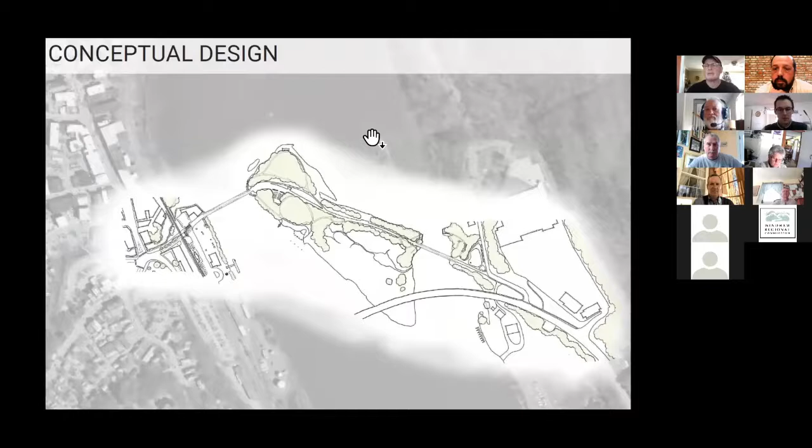So we're here to go over the revised conceptual plan for the island and existing bridges. It's titled The Living River, Balancing Recreation and Conservation Along the Hinsdale Island Greenway. So here we're looking at the conceptual design, and this is defined most prominently by the multimodal pedestrian spine running through the island and along the existing bridges, called the Hinsdale Island Greenway.

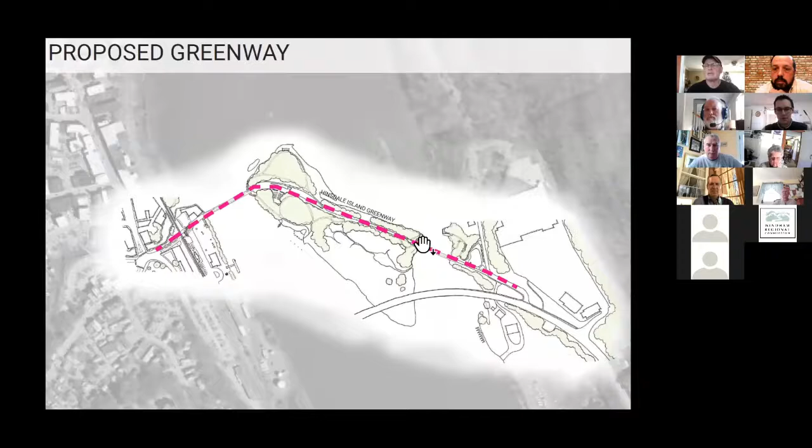This proposed pedestrian connection, bicycle connection, serves to connect downtown Brattleboro and the Brattleboro Amtrak station immediately to the development on the New Hampshire side, Runnings and Norms, as well as the Wantastiquet-Monadnock Trail and Wantastiquet Mountain.

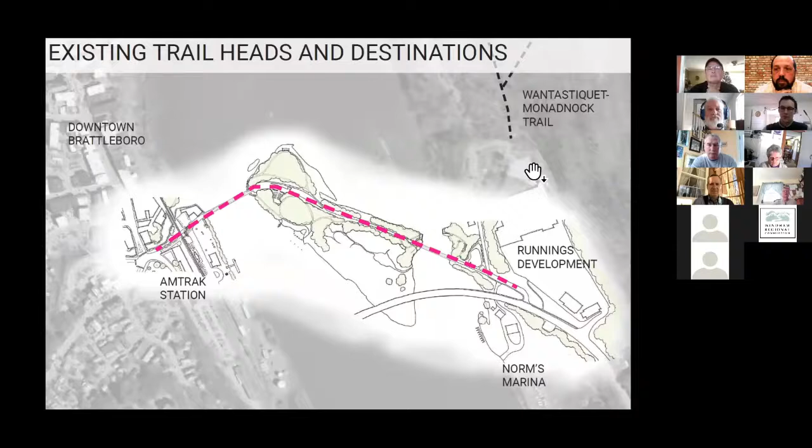In addition, it keeps an open mind to future new connections beyond the scope of this project, such as river access, connecting this proposal to the West River Trail network to the north in Vermont, and also an extender on the New Hampshire side between the end of this project and the current end of the Fort Hill Rail Trail, which would in effect create a pedestrian and bicycle connection across the river from the entirety of the West River Trails all the way through the Fort Hill Rail Trail and Hinsdale.

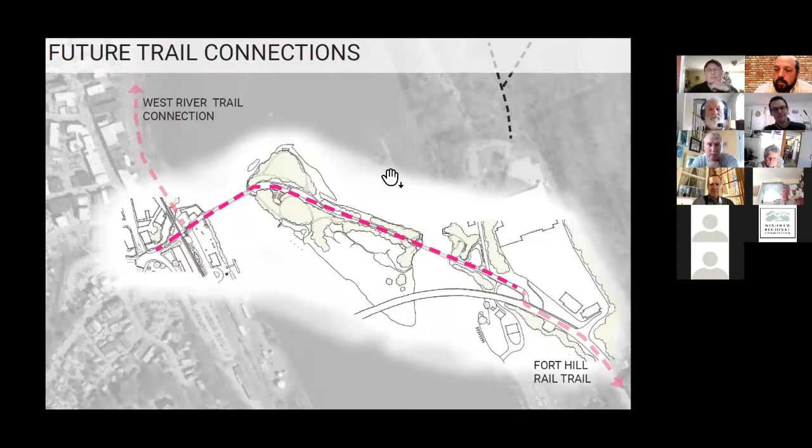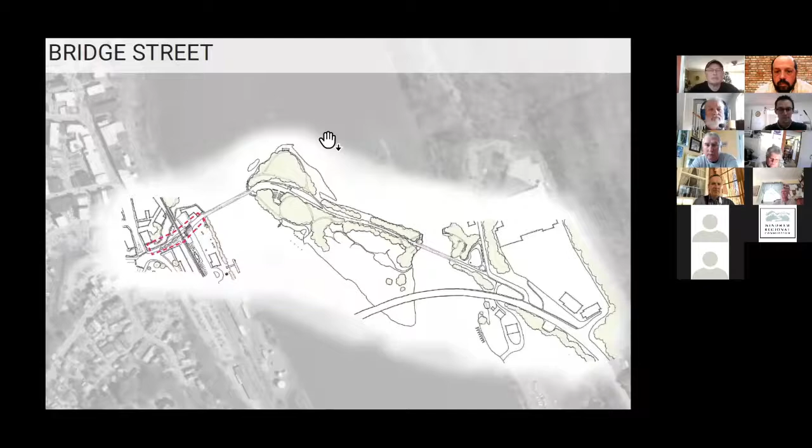A quick note is that in all renderings, the Anna Hunt Marsh and Charles Dana bridges are being shown in a new color to illustrate the potential and also the significance of color as a design choice. I don't have a ton of marker colors that really pop, and so red is the one I went with. So I'm not specifically advocating for red. I believe the color choice is something the communities and committee should decide, but I do think it's an important decision that needs to be considered.

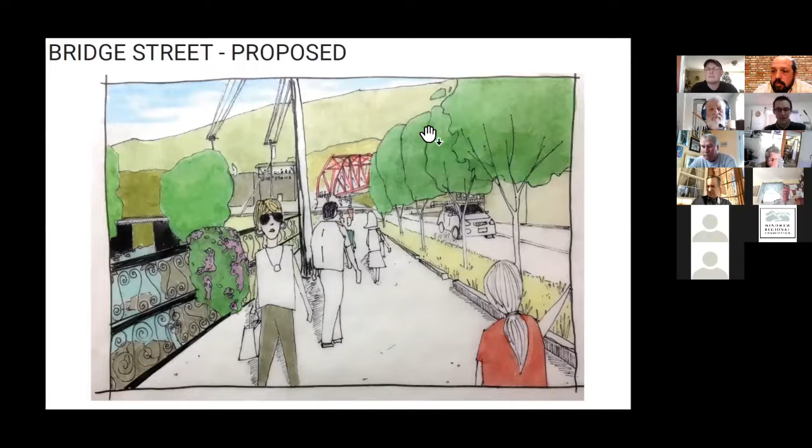As you move down along the Greenway, you approach the Anna Hunt Marsh Bridge. Currently, it's a paved streetway, and upon renovation and design implementation, we're proposing a mixed-use, multimodal transportation route. So space is split between movement and gathering. The majority is given to movement back and forth across the bridge, but then using movable installations, such as standing tables shown here on the Whetstone Brewery end of the bridge, and planter boxes to create separation and define space to allow for a range of activities to take place.

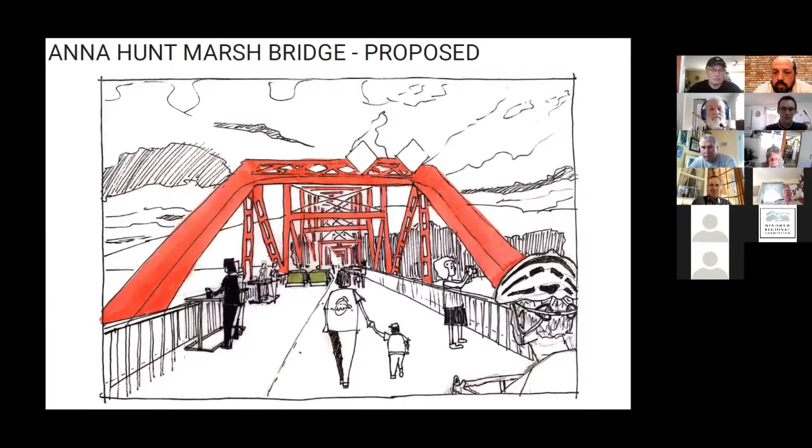In this proposal, the travel width along the bridge is 12 feet wide. After talking with the chief of fire from one of the towns, we determined that about 10 feet would be adequate for the existing trucks in town. So this should maintain more than adequate emergency vehicle access across the bridges and to the island.

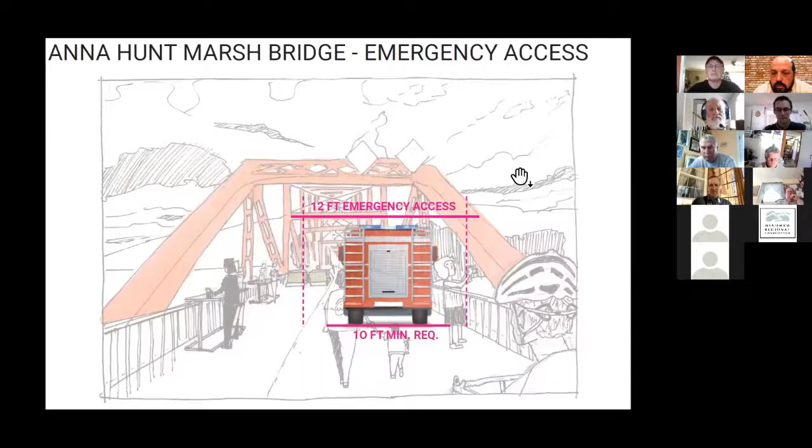For the design approach to both bridges, the Anna Hunt Marsh and the Charles Dana, I believe that it would benefit from being a flexible approach defined by modular components. I think this is important because it allows for the evolution of the design to better suit community needs and possibly changing needs, whether that's over years or over seasons.

And so here are just two initial sort of back of napkin working sketches on what some of those modular and movable planters may look like. But this also extends to any sort of tables or seating furniture.

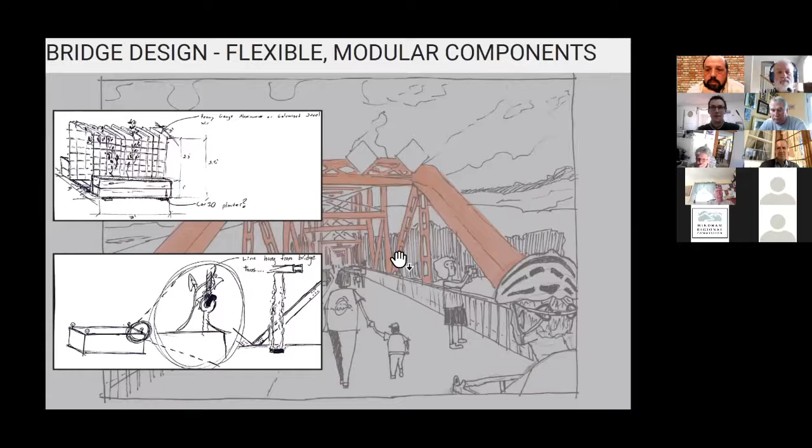Now, again, this allows for the design to respond to use and feedback, and also gives you the flexibility to consider the use of these bridges for other sorts of events, whether it's community art takeover or some sort of market. I've also heard suggestions through our various public forums of wedding venue or wedding photography and whatnot.

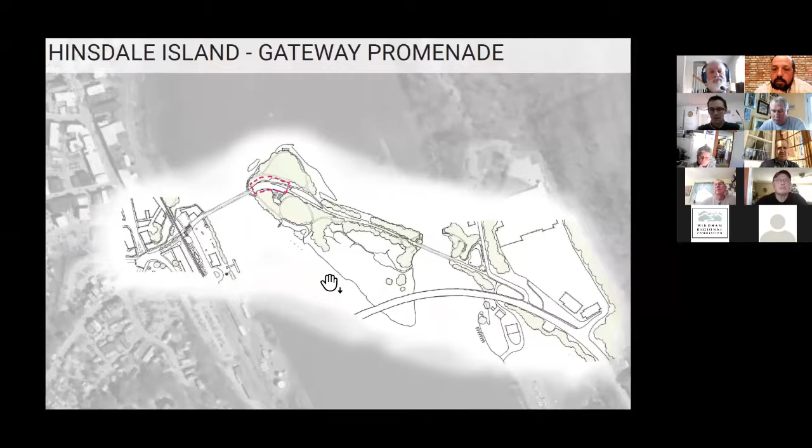And then at the terminus of the Anna Hunt Marsh Bridge, we come onto the western edge of the island. This is where we're proposing a fairly wide gateway promenade, outlined in pink on this plan. And this is the location and the existing conditions. And the proposal is going to utilize both the existing roadway at this point and a section of this grass shoulder and turning into temporary parking, I believe a gravel surface.

This is a section rather than a perspective, so a cut through the roadway at that point, showing the width around 50 feet. So again, that's the width of the existing roadway and that grassed shoulder, and its potential uses. Bumping out the width of the promenade at this initial entry point allows for more flexible uses. It allows you to keep transportation avenues open while also bringing on to the island other programming to support events, whether it's cultural events at the amphitheater or community events arranged more along the spine of the Greenway itself. So here you see some food trucks brought to the island.

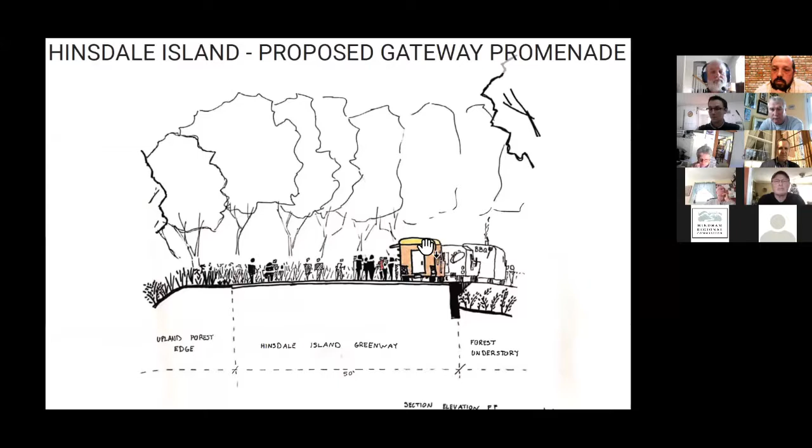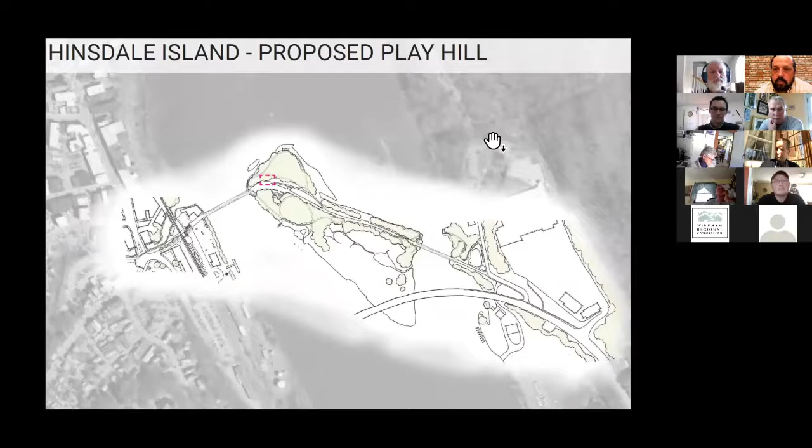Off of this promenade to the northern edge is the proposed play hill. And so this is a rendering of that proposed play hill. It's a low impact, very naturalistic proposition here. No slides, no sort of typical playground equipment, simply using a series of rock blocks placed into the hillside to create a sort of artificial rock scramble for both children and, nothing would stop adults too from enjoying this, moving between the roadway ridgeline and the base of the ridgeline in this existing forest. And this is oriented to the west, looking at the Brattleboro skyline in the background there.

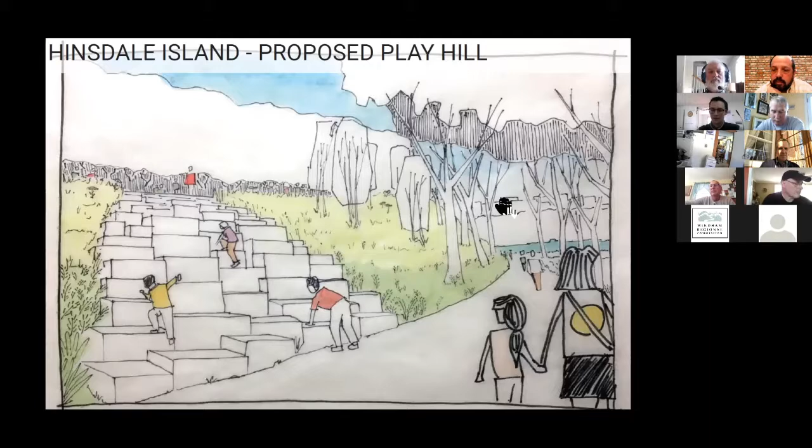So just a little bit further towards the end of that wider promenade gateway is the proposed amphitheater. So this siting changed a little bit. It moved a little further inland from the last time I presented, and that's to decrease the environmental impact of this amphitheater development. There was quite a strong view expressed for sort of a least intensive development without much hardscaping, such as retaining walls, seating walls, and whatnot. So that requires a space with a bit more run and a bit less steep grade, and so that led to this move.

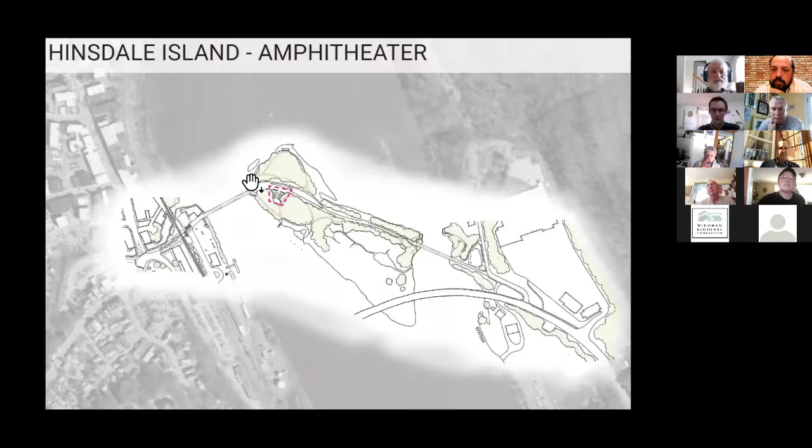The existing conditions here are what would be a fairly open understory if it weren't for the current sort of dominant invasive species, primarily Asiatic bittersweet, but also multiflora rose and Japanese barberry, that are currently occupying the understory and much of the overstory as well.

The proposed conditions here show it's about a 60 to 70 foot deep space, and then you have a small level performance space at the base with a medium grade, 8 to 10% down, and relatively low impact rings of seating. There is a flat level area offset of the Greenway at the top for ADA access, as well as we'll see a ramp curving down in the adjacent woodlands to provide ADA access at the base. Additionally, the vegetation management should allow for views to open up to the water from this space, which will help increase its multi-seasonal appeal.

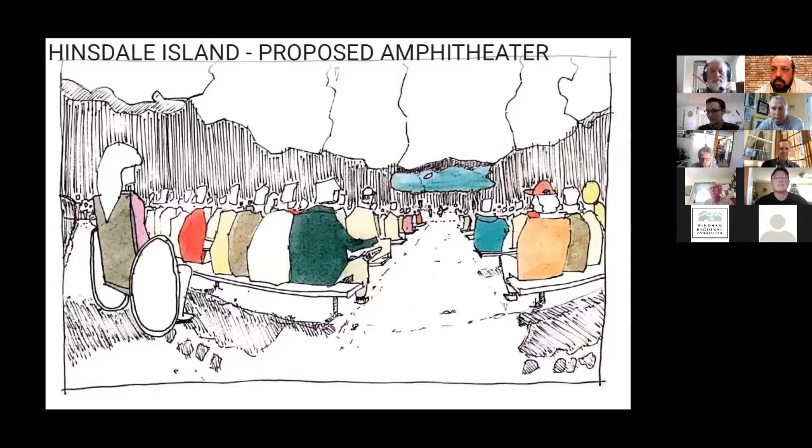Moving a bit further towards the sort of hanging off of the center of the island, but towards this southwestern facing edge, is the proposed public water access. We're calling the Hinsdale Island Beach and Cove. This can be accessed by the two ramps towards the center of the island leading down, or through the ramp adjacent to the amphitheater leading down. And we're going to zoom in on this in just a second.

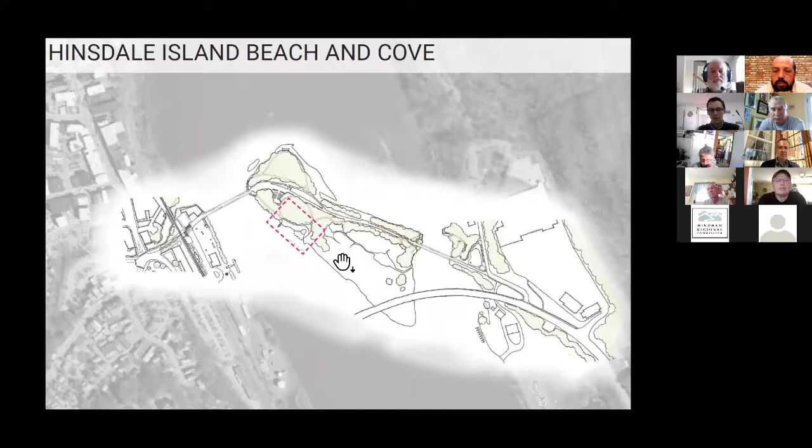So the space really doesn't get pulled too far into the island, and again, that's to reduce disturbance to the existing overstory floodplain trees. And it utilizes a small stretch of shoreline, which would be cleared where the beach is, and a slight change to the shoreline structure as well. A slight, very shallow, like 1 or 2 feet down, depression would be created to create this protected cove, which will act as sort of a wading area for younger kids, just a foot or two deep.

A series of placed boulders protect the entrance to the cove, and a small section for slightly deeper wading and swimming. And then off of that, further out into the river, proposing a handful of dock pilings, which would provide opportunities for boats to tie up and owners to wade in. The short stretch of unprotected beach closer to the top allows opportunities for motorized boats of the appropriate craft to nose up and anchor into the shallows.

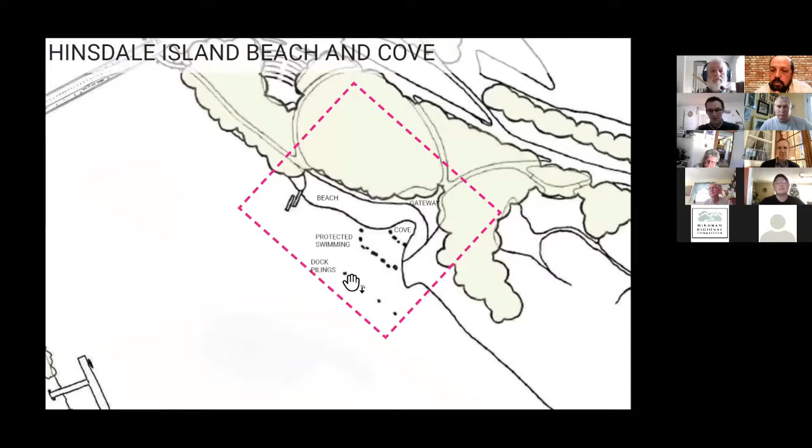As well, the entirety of this is open to paddle boards and kayakers pulling their craft up, and they would be able to slip through these boulders and access the entirety of the beach. We're going to look at this gateway space first, inland of the cove. Then we're going to look at a transect from the gateway to the dock pilings, and finally we're going to look at a rendering of the beach.

This is a section through that gateway showing sort of the proportions of the space. There's a nice entryway that runs straight from where these two ramps down through the now managed and enhanced native understory. Enter and go to the cove, and then off to the side there's spaces to introduce a few seating elements.

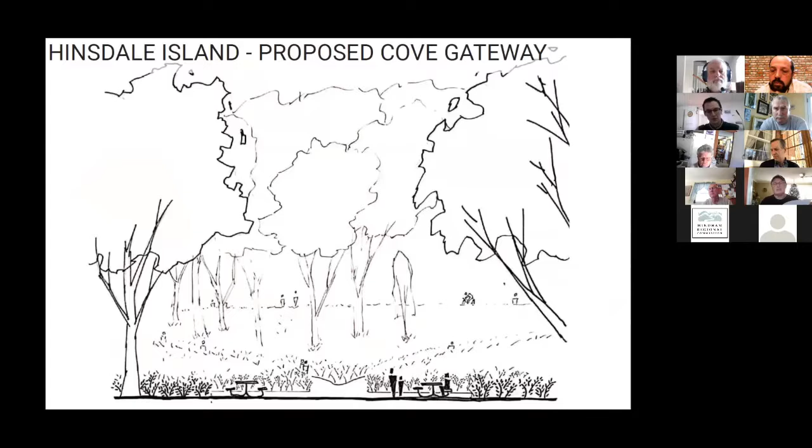Here on the left, where again is that same gateway and seating space, you see the short section of beach with the wading inlet and the first round of protective boulders. You see the deeper wading and protected swimming area with a second round of boulders. And then you see some additional section leading out to where those pilings are for boat tie-ups.

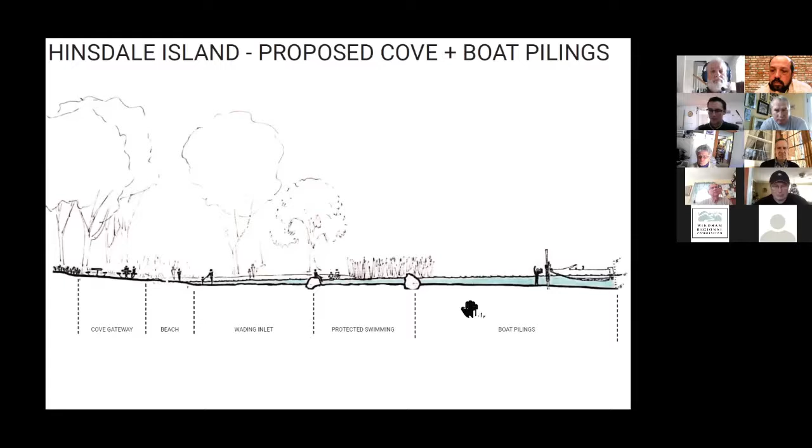And this, from that protective ring of boulders, is a rendering looking at that stretch of beach along the shoreline. Again, showing those opportunities for different types of use, for different types of craft to pull up, and the introduction of these seating ledges to delineate the walking path from the beach so that craft aren't pulled up too far and block movement through the space.

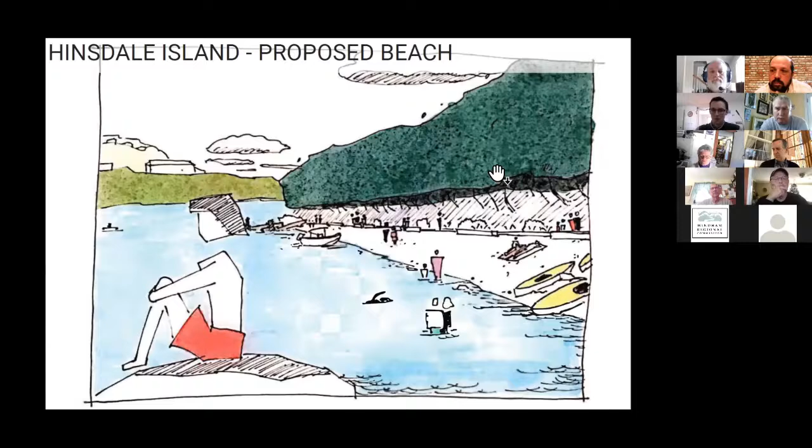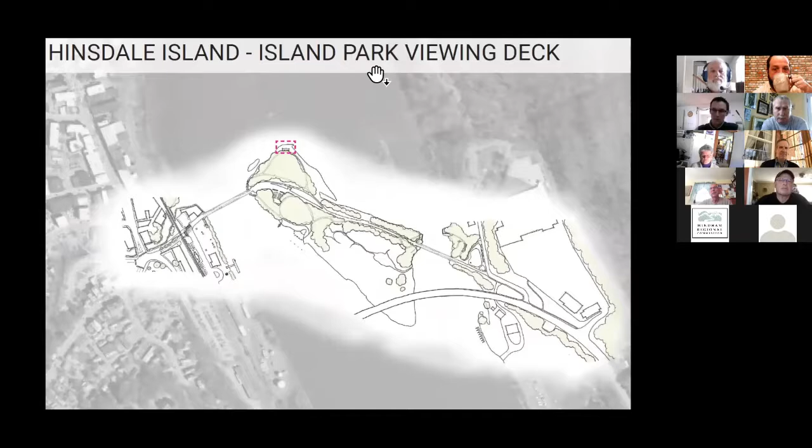Moving to the northernmost tip of the island, we're looking at the proposed Island Park viewing deck. And this is meant to provide a sort of pristine platform for scenic viewing, wildlife viewing, and also people viewing as motorized craft and paddlers move up and down the river.

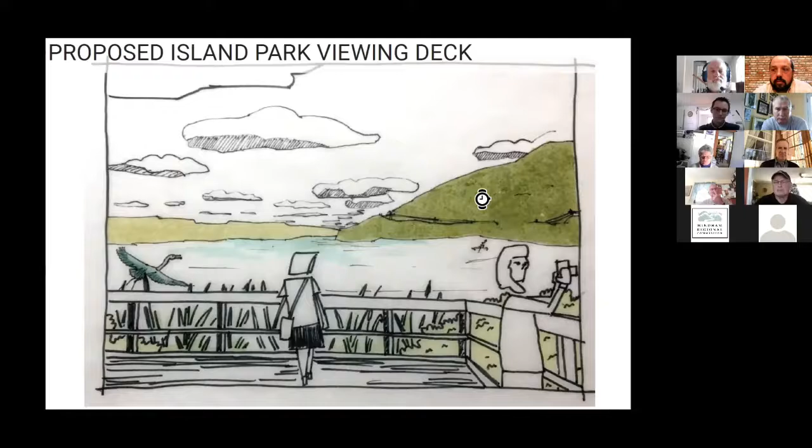As we continue along the Greenway to the eastern portion of the island, the portion of the island outside of the roadside is dominated by marsh, which has been set aside and conserved in this conceptual plan. We have 3 more wildlife viewing platforms. 2 of them in the middle and towards the end of the island face the marsh for wildlife viewing and also scenic viewing downriver. And 1 in between those 2 faces to the north, allowing for upriver viewing, also great views of the Wantastiquet Mountain and that small island just about 100 yards or so off the main Hinsdale Island.

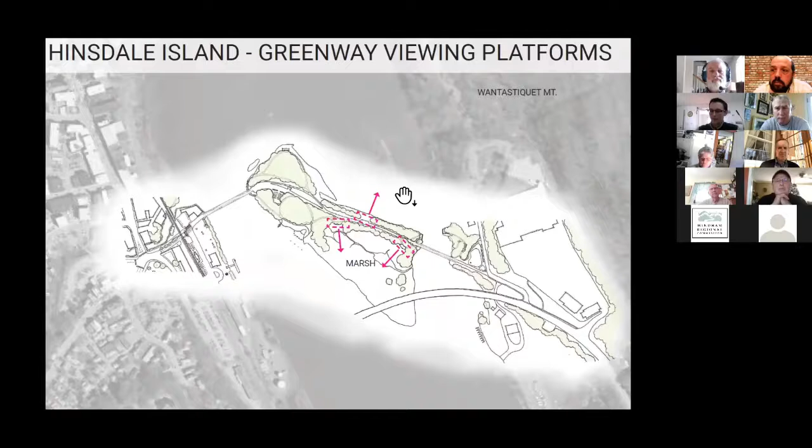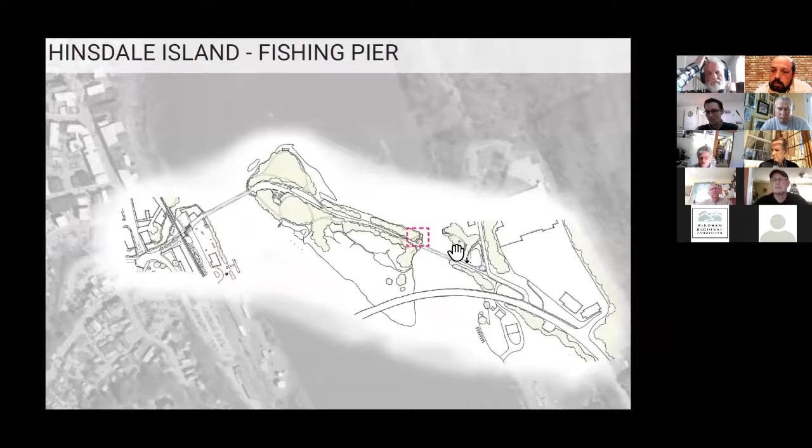At the easternmost end, just off of where the Charles Dana touches down, is one of the older bridge footings that's currently been observed as being a good spot for fishing due to less vegetation along the edge to tangle your line in. So this is being proposed to continue to be set aside as a fishing pier, but improving access to it, providing a bit of seating and trimming a bush or 2 that currently would tangle up lines.

As mentioned previously, the Charles Dana Bridge is going to have a lot of similarity in design aesthetic, modular components, and types of spaces as to the Anna Hunt Marsh, except it's going to prioritize a bit more heavily areas for scenic viewing and sort of more contemplative spaces as we sort of move along this gradient between denser populated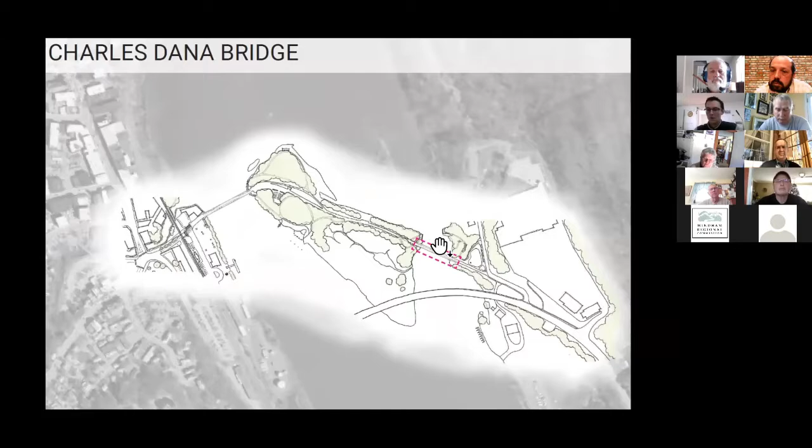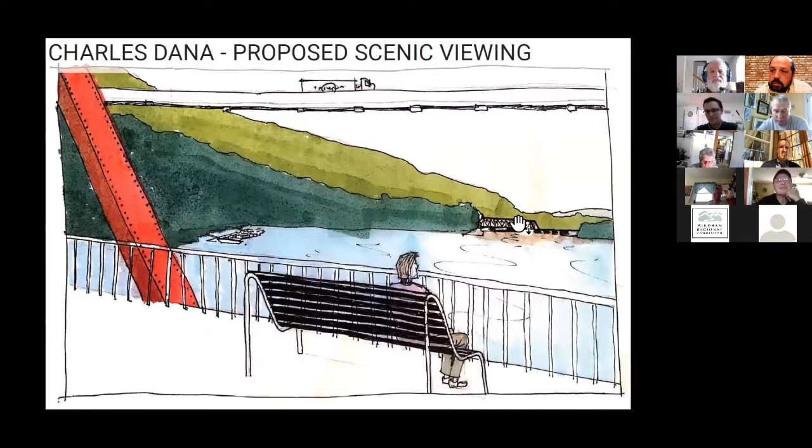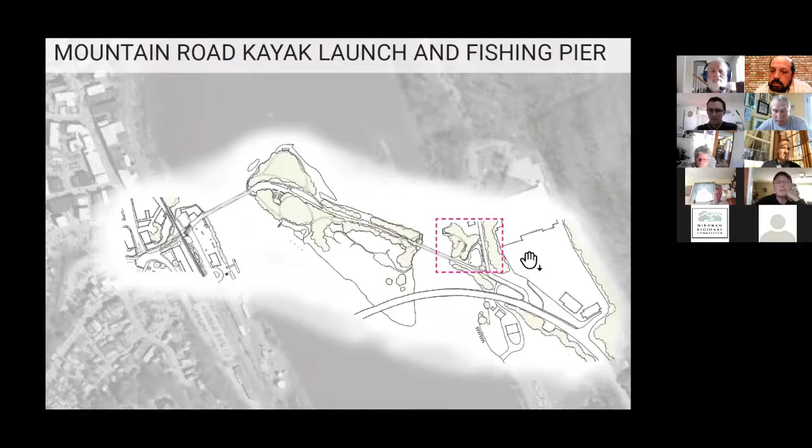All the way on the New Hampshire side, in between the Charles Dana and Mountain Road, is a parcel that is going to be developed in part by DOT to retain and treat stormwater coming off the roadsides. And there's also a proposal here to provide it as a point of water access on the New Hampshire side. So we're going to zoom in here and take a look at that.

So here we have our Mountain Road just downhill of the Runnings building. And what's being proposed is a water access that provides for a kayak launch point on the New Hampshire side and also access to a second fishing pier. Now, this is going to require a slight change in the most up-to-date plans I've seen for the stormwater basin.

In order to get room to have any on-street parking on Mountain Road, the stormwater basin is going to have to be moved about 10 to 13 feet west away from the road base, which may be achievable. We'd have to talk with DOT and sort of get into the details.

I believe this is an effort worth considering quite strongly, because although the Runnings owner has graciously said that she would allow people who wanted to access the water here to park in her development, that's still quite a hike, whether it's around the back or down the front on the new proposed ramp that New Hampshire DOT will be building to get down to this section of Mountain Road and access the water.

Being able to, at the very least, drop off and ideally have a parking space or 2 will greatly, I believe, improve the usability of this water access point, and also make it a premier water access point for ADA access. We have the room here to run out an ADA graded path all the way down to the water and the fishing pier.

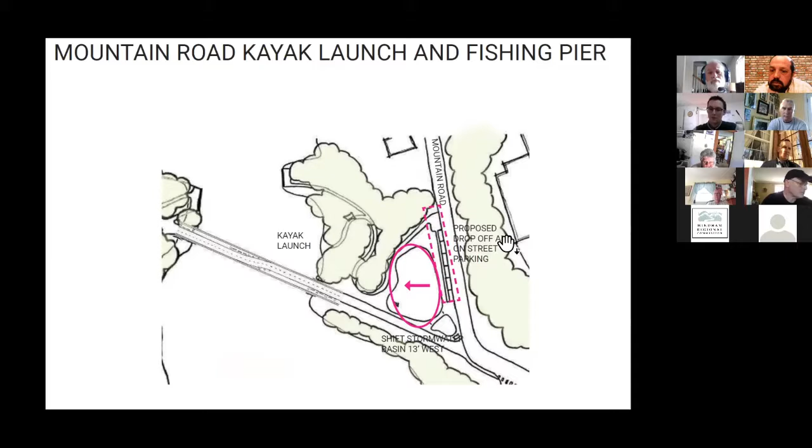So being able to park adjacent to it and cut down the amount of the ADA path you need to traverse makes it much more friendly to movement challenged portions of the population. I want to take a moment to talk about the conceptual path systems.

They're being conceptualized as 3 levels of accessibility, and the majority are being conceptualized as ADA accessible. In a large part, this is simply the status quo. The entire spine of this is running along an existing roadway, which is ADA accessible, both in surfacing material and grade, and that's going to be maintained.

Additionally, some of the new paths to sort of the critical community-based gathering places off of this main spine are also being proposed as being designed in such a way and with such materials as to be ADA accessible. That includes this loop connecting to both the front of the amphitheater and this big water access gathering space, as well as to the viewing platforms and the fishing pier.

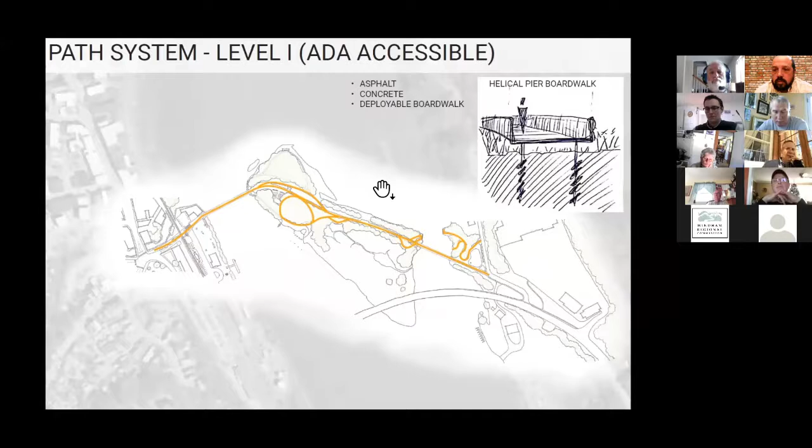In addition, ADA graded paths will make it easier for people to get down to the northern portion of the island. And so this is going to be composed of a range of materials. A lot of the existing is asphalt. Where possible, asphalt and concrete would be the economical choice for new paths.

And then where environmental concerns bar the use of asphalt and concrete, then we think about more creative solutions, whether that's floated boardwalk on helical piers, whether that's more of a low-tech deployable boardwalk, similar to what's used often on Cape Cod dunes, where you have boards attached by fiber that can be rolled up and unrolled and deployed along pathways in more of a seasonal manner.

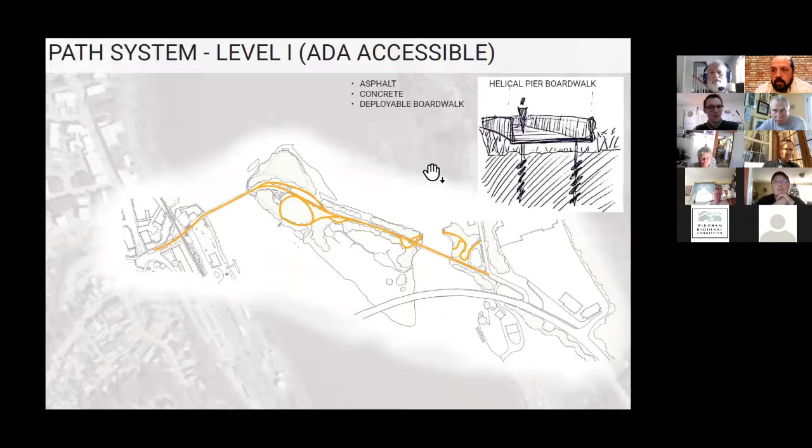Level 2 access consists of this loop around the western edge of the island, under the bridge, and around this promenade. And so this would be more of a packed gravel path. So not ADA accessible, but still graded very accessibly, still a very accessible material, just not to the degree of what's necessary, say, for wheelchair access.

Then finally, level 3 would be the widest ranging loop out to the northern tip of the island. This will be the lowest impact and the most sensitive path that's put in, proposed simply as a packed earth footpath. And so this will also, you'll see, have varying accessibility with the seasons, right? In the wet season, probably none but the most avid birder will want to get their feet muddy and make it out to that viewing platform. But then in dry weather in the summer months, quite accessible to a majority of the population.

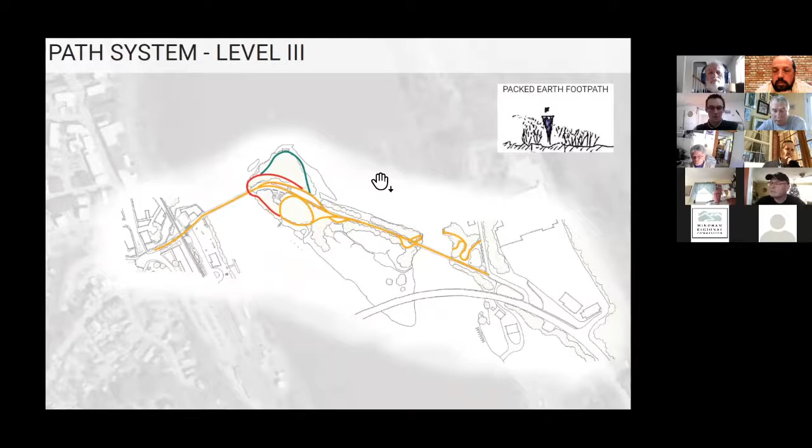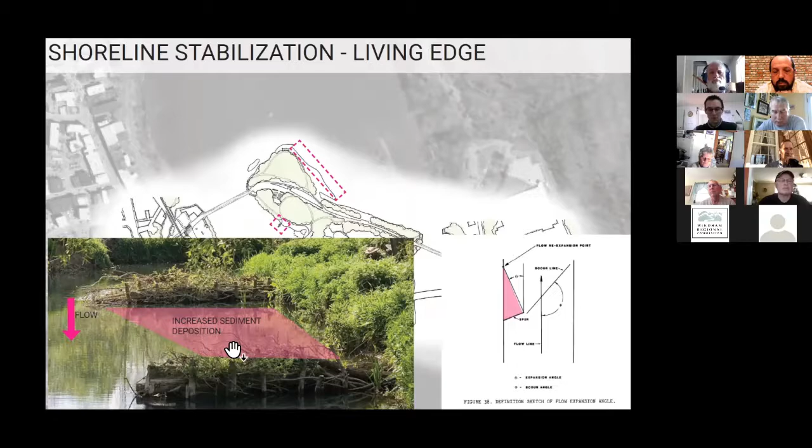This is an example, on a smaller stream channel, of what this type of thing looks like. Instead of a single log and root wad, they used wattles, which is bunches of medium-sized logs sort of staked together into a mass. And again, showing the area of lower flow rate and therefore increased sediment deposition and shoreline protection. When partnered with the planting of willows and alders on the shoreline adjacent to where these structures connect, you sort of get a synergistic effect.

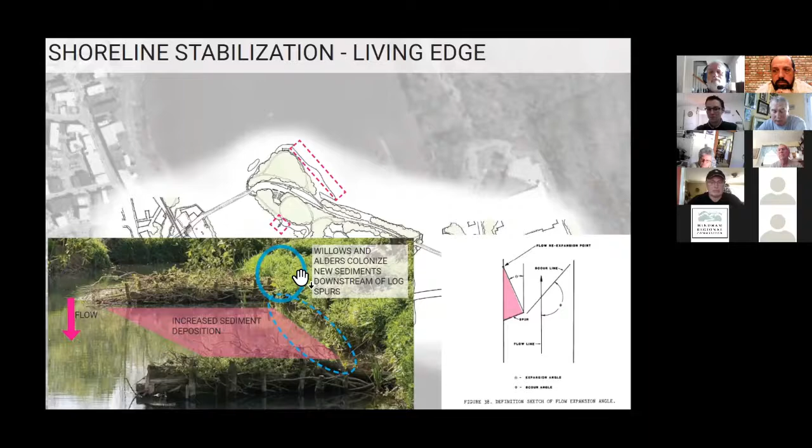These types of plants are great for wildlife value, and they're vegetative colonizers, so they will spread and sprout via roots, and they're very adept at spreading into new uncolonized shoreline sediments. And so as those sediments accrue downstream of these structures, they are colonized pretty quickly by the willows and alders, which help to hold them in place during flood conditions.

And then the other type of strategy is for a channel that's been identified when studying the topography. The channel is along this purple line. It's not permanently filled with water. It's a flood channel, so during flood conditions it would fill up. And it's a foot or two deeper than the rest of this northern part of the island. And so what that means is you have deeper and more water force impacting the base of the existing roadway.

And so I'm proposing a strategy of leaky dams, which again uses primarily woody debris, either in bundles or larger logs, placed perpendicular to the channel. And what it does is, again, trap sediment, slow down the flow rate, and also expand the floodplain to adjacent lands so that more sediment settles out and over time raises the height of that land.

And so these ideas would be something where, when you get further down the line, whether it's this committee or another one, and begin to think about phasing of whatever the final design is, I'd encourage it to be included at a test scale in phase 1, just to make sure that it works in this exact context. And if it does, then you can, with more confidence, go ahead with any sort of necessary investment to deploy it on a larger scale or in other areas.

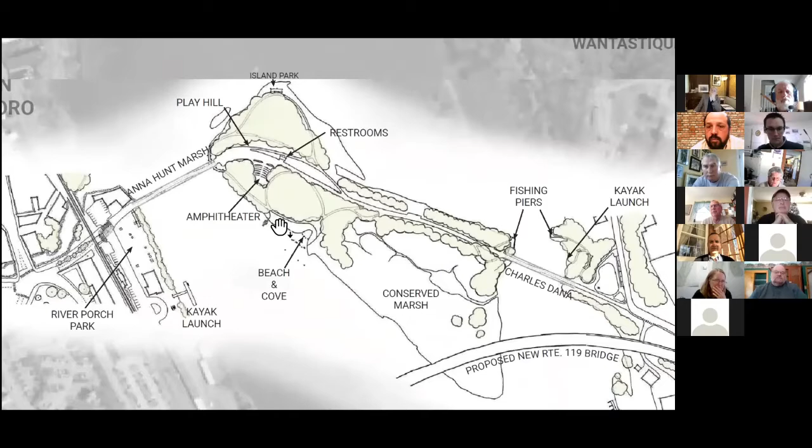Okay, I was referring to the beach and cove area that shows on your paperwork here. That's to the left of that, right above your hand now, right up in that area. You had something that was going to mitigate the sediment from forming there. It was going to be out further or away from the beach, so the beach wouldn't become a sediment collector like the current boat launch does. So this structure right here is what you're referring to, I believe.

I think so. As I understand it, it would trap a little bit of sediment in the front. It would also trap a little bit behind, but the main reason I'm putting that in is because you have a more vulnerable section of shoreline here since it's cleared of vegetation, and this will slow down the flow velocity downstream of it, and thus reduce the potential for erosion under flood conditions of this beach area. So that would not address the sediment that currently accumulates there?

No, you would still get sediment accumulation over time to a degree. The point that would probably require maintenance on some time scale would be this small inlet that's being created along the edge. As you get sediment accumulation, the entire edge might move out, but it'll only do that to such a degree before it then reverts back into an erosive state, as the channel narrows. But this little inlet, I would expect, requires maintenance on sort of a longer time scale. And I'm not a hydrologist, so I couldn't tell you if that's 5 years or 20. I suspect it's in between those two. I don't know if that answers your question completely, Ed, but hopefully it was somewhat relevant.

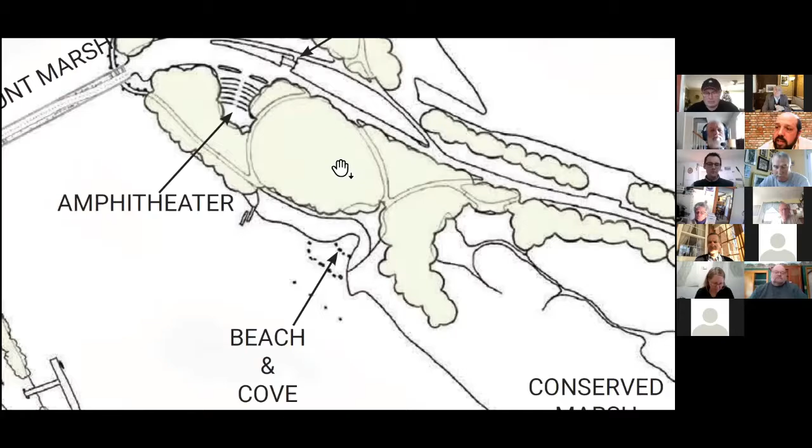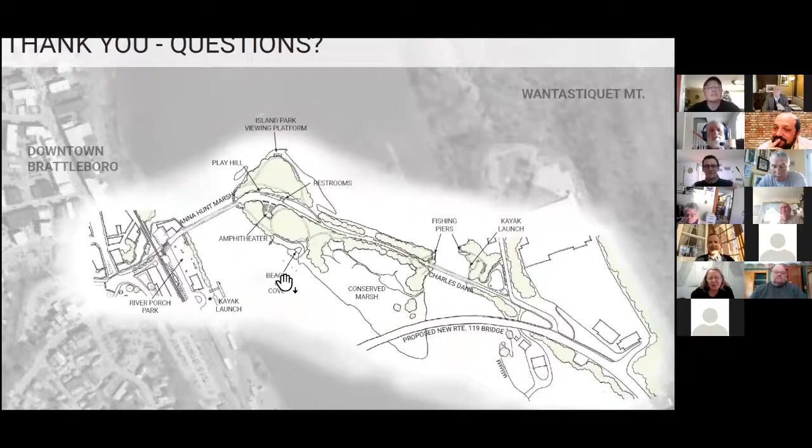Kathy, can I ask a follow-up question related to that? Which is, can we leverage any of the relicensing effort to study that issue? Or would it be expected of us to find our own sources of funding to study that issue? Yes, we can and should leverage as much as possible to study that issue. And that operational change, I think, is going to be a big win for the river. It's a great move on the part of Great River Hydro.

But what is not included in the license, and which we will be arguing to include, is monitoring of the changes over time, and also much more investment in recreation than what they currently proposed in their application. So, yeah, I could definitely see a role for Great River Hydro being a partner in that, and we'll be advocating for that. And I would suggest, this is sort of getting off topic, that all of the other organizations and towns involved in this discussion should probably plan to comment in the coming year on this application. Thank you, Kathy.

I think we're all set with questions. Catherine, this is Steve. Oh, we've got a couple hands up, Catherine. Oh, okay. Hold on. I had to switch to my phone. My internet went out at my house, so that was fun. I can help you out if you'd like. Steve DiOrio and Chris Chapman both have their hands up. Oh, okay. So we'll start with Steve.

Just a quick comment and question. Chris, really appreciate the renderings that you've done, and we want to try to make them available to more Hinsdale residents via our newsletter, area news, and such. So I think you did a great job with those. Quick question on the pilings and that log system for the sediment. Are those, for lack of something scientific, ice proof when in the spring there's an ice out or the ice crashes down the Connecticut River? Would those be stable?

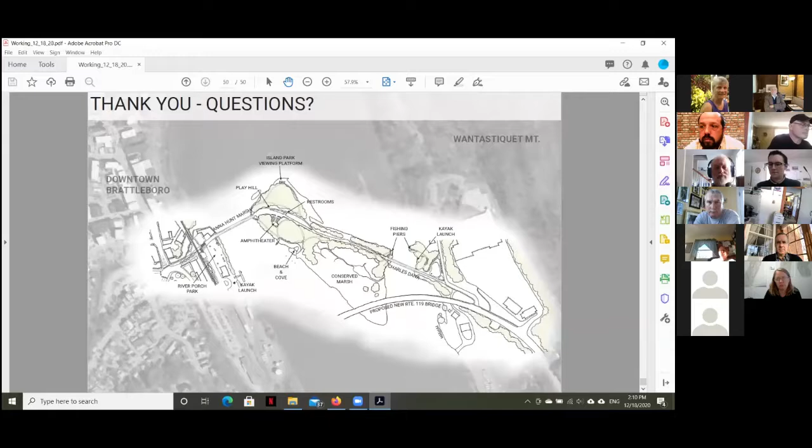Thanks. Is it possible to take a quick look again at the graphic that showed the entrance from Anna Hunt Marsh onto the main part of the island? I'm just wondering, so I know the width is 12 feet, so I just want to confirm that there's plenty of space for pedestrians to be walking and cyclists to be riding past there and so on. And I'm sure on a normal day, when there's not an activity in the amphitheater and so on, I don't think it would be too much of an issue, but.

Was this the slide you were referring to, Prudence? Yes. Yeah, so as you mentioned, I would anticipate that on a normal day, normal traffic, you wouldn't have conflicts. And in a way, on a busy day, you would have conflicts in a good way. In practicality, if this got real busy, most bikers would voluntarily choose to dismount, because it's hard to balance on a bicycle at the pace of pedestrians, and you wouldn't have room to move around them. And I believe that's a good thing when it gets busier.

And really, it's trade-offs. I think the trade-off this design made was designing something that works for both user groups on the majority of days, while also providing some opportunities for activities other than movement across. The other hand of the trade-off is that, like you were getting at, Prudence, on a real busy day, say if there's an event along the Greenway on the island or in the amphitheater, you may have crowd sizes that do not allow room for bicyclists to move past pedestrians. They would just dismount and walk with pedestrians.

Prudence, I would add that the typical multi-use pathways that we see, multi-use meaning pedestrian, bicycles, roller skaters, etc., I think the narrowest they would get would be 8 feet, and that's not really ideal. And I think what you're proposing here is up to 12 feet. Is that right, Chris? Yes. And would you have any sort of lane markings, would you ever recommend that for putting people in their, you know, walk on the right type of idea? Or, I mean, maybe it's too early to tell, but.

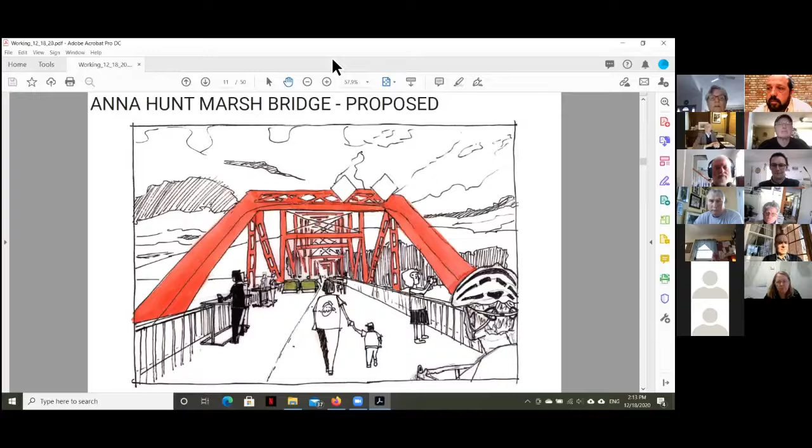I think now we should move forward and talk about our next meeting. So JB, would you be sending out a poll for that? Yeah. First off, just one follow-up item to close up this part of the agenda. Chris mentioned at the beginning that we're looking to get feedback on these big concepts. If you think about the different components of the plan that Chris talked about in his presentation, we're looking for you to provide any input as to whether you see elements like that working or not working. We're just looking for additional guidance to make sure that the conceptual plan in the making, the skeletal structure of the plan, is a good one, and it's meeting the needs of what we've heard from the public so far and from this subcommittee.

And I'll send an email out either today or on Monday reminding people of the deadline to get back to us by January 8th. So I just wanted to finish with that. Chris mentioned he's going to provide me a PDF of this, which I will share with the subcommittee, and I'll also post it on our new webpage for this project. And I'm also planning on putting his presentation up as a video, so people can have that context as well if they choose to review it.